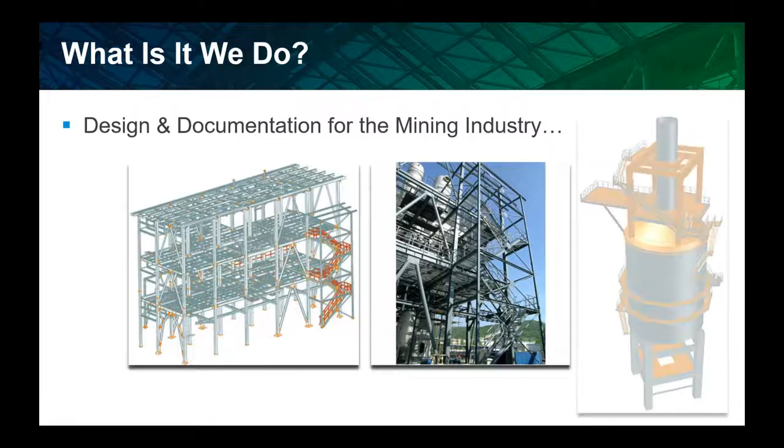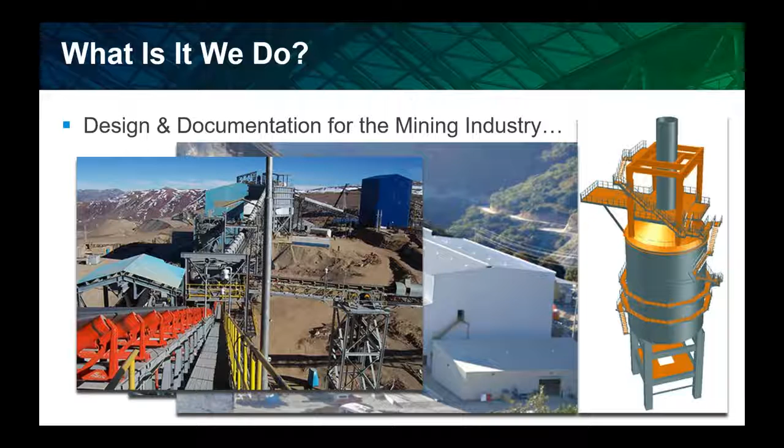We have a lot of enclosures that we need to clad, and cladding is an aspect that we can find in Advance Steel, and there's a lot of benefit there that we can even generate shop drawings on. But from the Plant 3D side, we usually find that in order to do this, we're using some CAD approach. Incline conveyors, overland conveyors. We don't really see tools in any of our applications that are well suited for this.

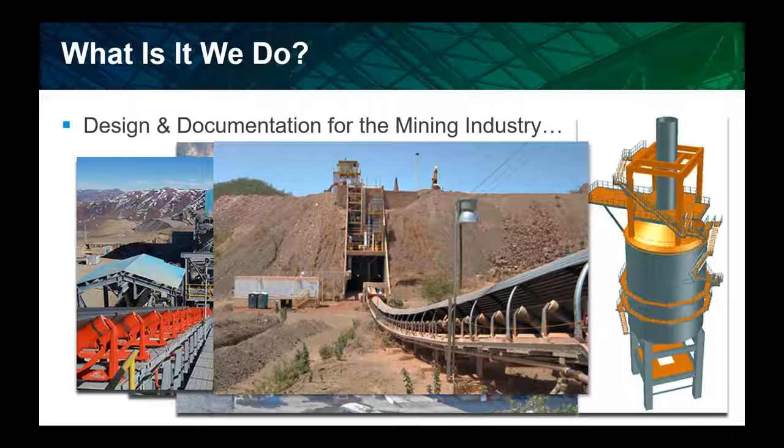So we often find on the mining side that we work in several pieces of software to generate the general assembly, the engineering drawings, erection drawings, and shop drawings as needed. And don't forget, of course, we need pathways and other alignments that may be drainage. It may be passageway for any vehicular access and so on. So Civil 3D, being an engineering package, can suit that purpose, and we find that a lot of our mining clientele utilize that package as well.

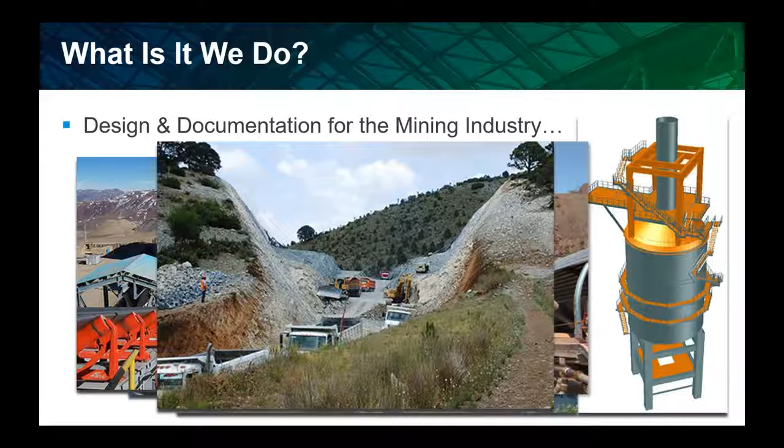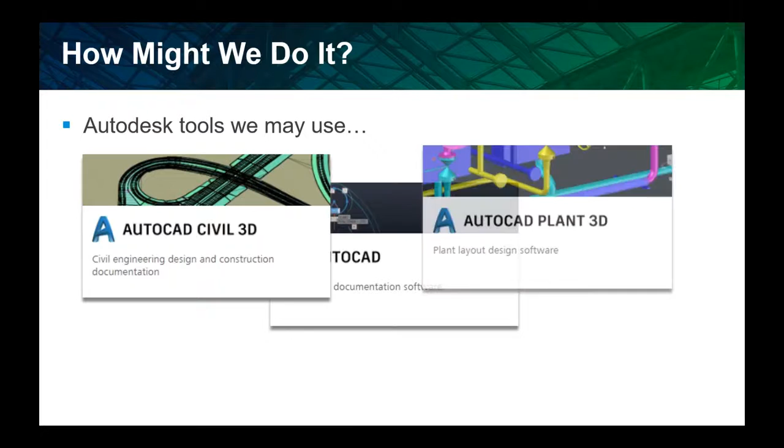So how might we do that? I mentioned AutoCAD. Even at its base approach, certainly to do P&IDs. Another reason that we like the Plant 3D software is that we can do P&IDs. There's a lot of smarts built into the P&ID module that works inside of Plant 3D, but we could do that in just regular vanilla AutoCAD. I mentioned Civil 3D for the civil engineering aspects on a mining site. AutoCAD Plant 3D itself with P&ID on board.

Navisworks Manage. I hope no one forgets the aspect that when we generate these big three-dimensional models in whatever software it may be, Navisworks Manage is a capable tool that can support multiple model file formats from varying industries and varying suppliers.

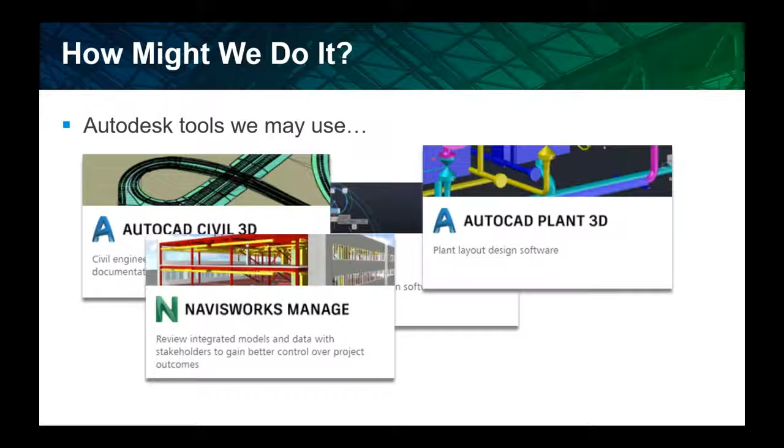One that you might think a little unusual, Revit. Its structural aspect; we don't really refer to them as architecture, structure, and MEP so much as we used to. We now have Revit all-in-one. All the disciplines are inside the application that we now title Revit. But I find several clients utilize Revit for the structural aspect. They like the ease of modeling with the building information modeling approach, being able to handle that steel.

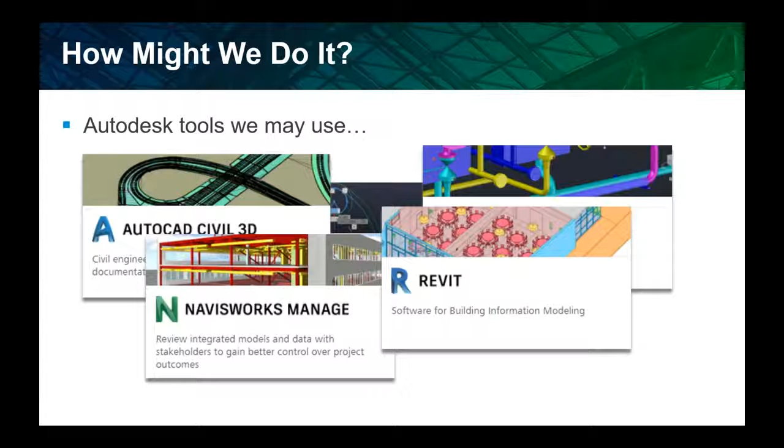I'll have some images for you in terms of then the problem becomes, how do we collaborate or coordinate between differing applications? We don't necessarily have a Revit plant or a Revit civil. We need to move pieces of information from one application to another.

Another aspect that we find involvement of, the things that Mary mentioned to you initially that CADSoft does as services, we have been hired by some of our mining clientele to actually go on site, whether we are doing drone service flying, a UAV approach to do aerial capture of imagery and converting into topography that we can use in Civil 3D to generate alignments, earthwork calculations, and so on, or terrestrial-based scanning. We have performed these kinds of things, so we find then that ReCap Pro actually is a processing software in our Autodesk suites that we can utilize to deal with the point clouds that we can bring into all of these applications.

Now, these are only a few, and I'm sure everyone has probably heard of or already used the building design suites. Of course, that's a little bit of a name of old, and now with this year's release, we have collections, and I'm showing you these package names here because inside of the AEC collection, the real advantage now is that Plant 3D has moved into the AEC collection. We also have Civil 3D, we have ReCap, we have Revit, Navisworks. There are 20 applications and cloud services that exist inside that AEC collection, so that better fleshes out what we may find ourselves using in how we have to span the differing applications to do the differing discipline roles that we utilize inside the mining industry.

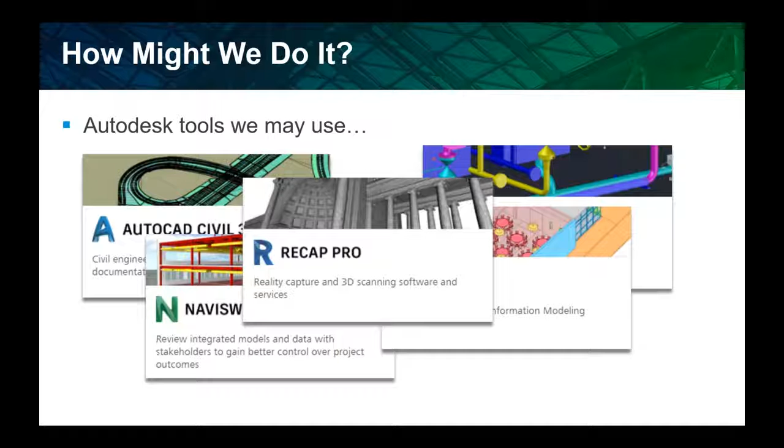So today's focus is Advance Steel, and in the very most simplistic summary I can give you, 3D modeling for steel detailing. Steel detailers may just simply be doing the design of connections. There may be a little bit more on design, but not only can we generate a digital prototype, we can also generate shop drawings, and we can further push that into fabrication and then construction. There's a lot of capability inside that application.

So what does it do? Here we're seeing an image of that digital prototype. We come into Advance Steel, and by the way, let's mention that Advance Steel sits on top of plain vanilla AutoCAD. A lot of the commands and familiarity we have if we are AutoCAD users. All the simple copy, move, rotate commands exist inside the application. But we're coming in here and we're now generating a 3D prototype.

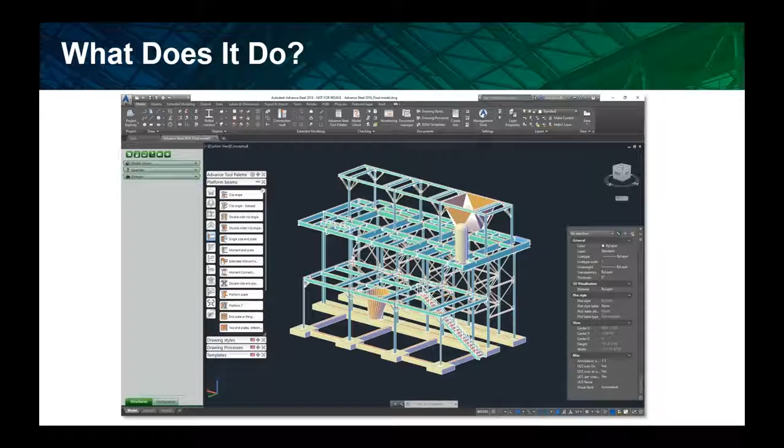And I get a little capture of the fact that we have specialized tools, and we'll find that Advance Steel is macro driven in that making these connections and placing these parts and pieces are automated in a certain nature to get all of the instances inside of a large project to that point so that we could then more quickly generate the documentation.

We have a manager on board inside Advance Steel that gives us the ability to organize our single part drawings, our main part and assembly drawings, our GA drawings, erection drawings, and so on. And also the ability to have reports and lists of many different kinds of things.

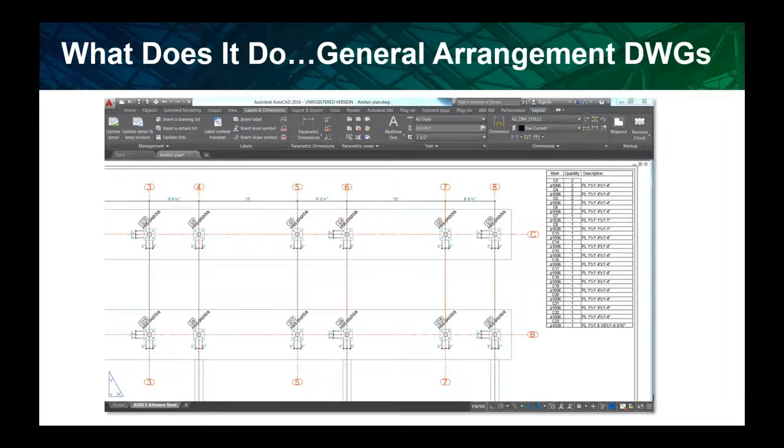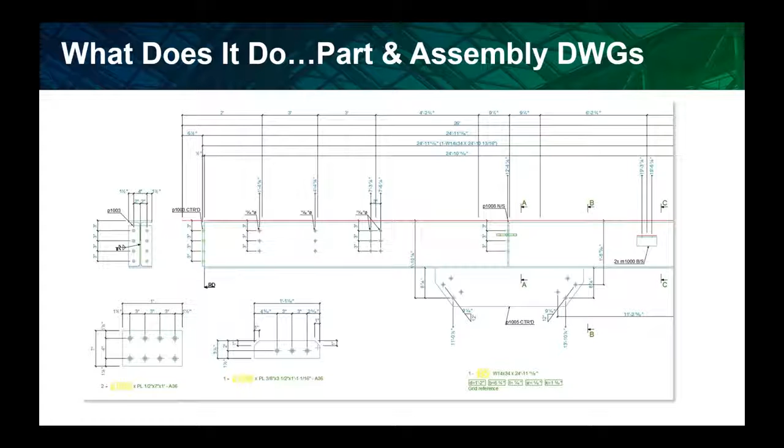And then I mentioned about pushing toward fabrication. So we take the model, we generate the assembly drawing. The assembly drawing has a lot of database connectivity to it. We can then create numeric control output. We create DXFs to push these out to presses and punches for plate creation, beam lines, and so on. So we have the ability to generate fabrication right from the model that we have coordinated. It is a fabrication level of detail model and everything we need. So a real plus that it can offer.

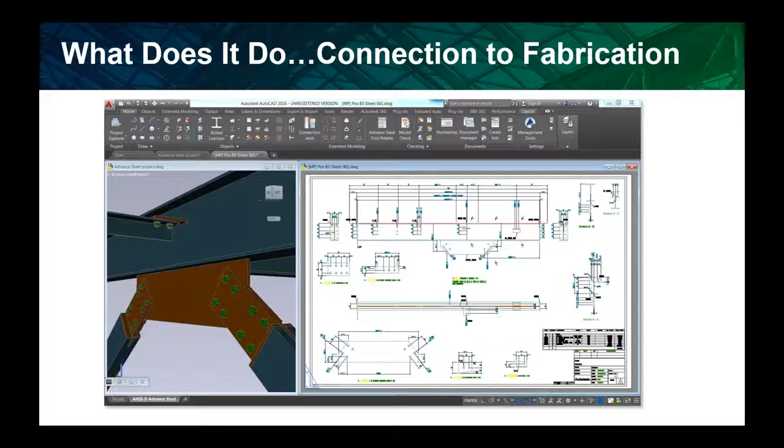Now, specific to the mining industry, we may be wanting to do some specific things. Why might we want to use this in conjunction with what we do in Plant? Plant does have the ability to generate some rudimentary profile sections. It has a large database, whether they be tube steel, standard pipes, wide flange sections, angles, channels, miscellaneous channels, and so on. It even has railings, stairs and ladders. Advance Steel has the same capability, but we have a benefit, and the strength that really comes from Advance Steel is miscellaneous steel.

So here we're looking at an image of a conical folded plate, and we see the facets at the radius corners. We have a rectangular or square to round shape transition with beam flange mounts that are bolted, if you can see the bolt shapes there. But the benefit there is that Advance Steel can do something that the Plant work will not do, and that is simply unfold this. And in our drawing generation, we can take that unfolding, and it will, however we define, place automated dimensions on there. We can break that up into multiple pieces in case it is too large for shipment or too large for handling, and it gives us the ability to manage that.

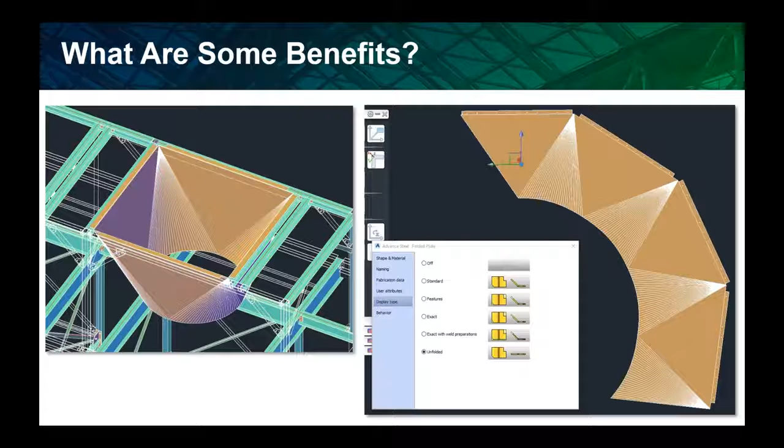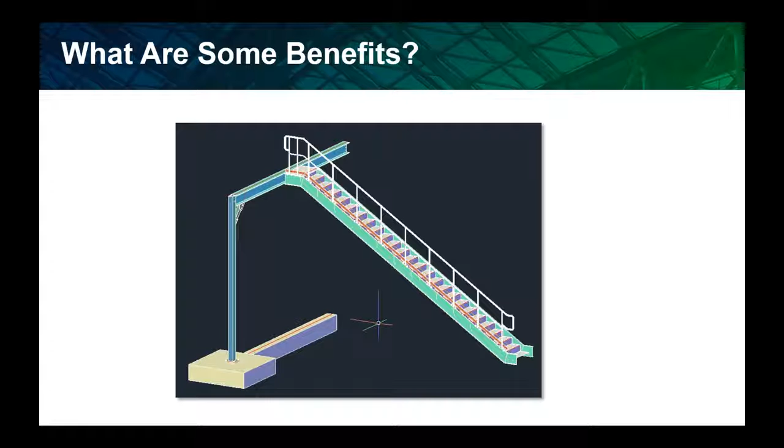I mentioned the benefit that it runs on top of AutoCAD, all the familiarity there. The fact that it has a level of detail 350 tool for stairs and railings in this simple little capture here. Full editability of all the parameters and how we want to define these. And one of the other great benefits is how we can go in and save configurations. Like if this particular stair and railing configuration was one I want to use again and again, which is an expected approach, I don't want to have to set those parameters up each time. I can save it to the library and with a single click apply that in a future project or in this same project on another instance.

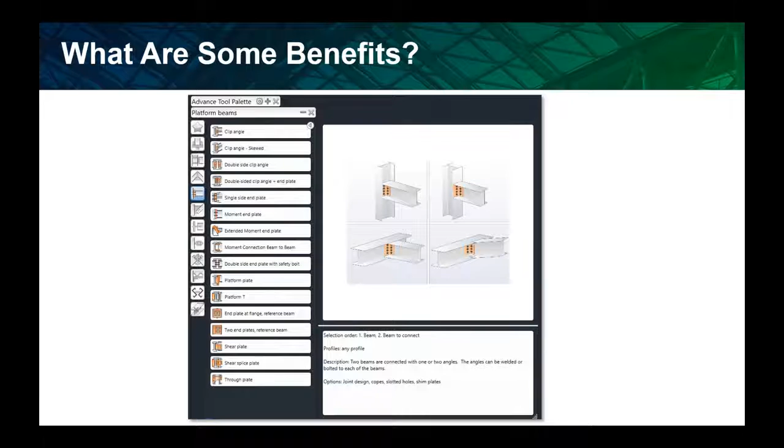And I mentioned, of course, the connectivity. That's the real crux of Advance Steel, is that I have these macros, and you see by name, I can create clip angles, end plates, moment connections, shear plates, through plates if I have tube steel sections, and so on. Having this information that can actually place these parts and pieces and then give me editability at the time I'm creating them or to come back after the fact is a real advantage in terms of steel detailing.

All right, well, why might we use this? And if we do, how might we do so? Well, I mentioned some of the other applications, and I'm going to talk about really three here: Plant, Revit, and Advance Steel, of course. So in versions of old, if you've ever tried to utilize a steel package, we always did a steel detailing neutral format, that SDNF file format export.

Okay, that's something that existed inside of Plant. It still does, even though if you look at the most current version, we find that now there is a button that simply says Advance Steel Export, and that is a steel markup language, SMLX, a little bit different file format. So people might wonder, if they've used the SDNF file format export before, did it go away? No, you could actually type it in on the command line. It still exists. You would see it autofill with AutoCAD's feature, so if you still want to use that, that feature is there. But in some form, we need to get this out.

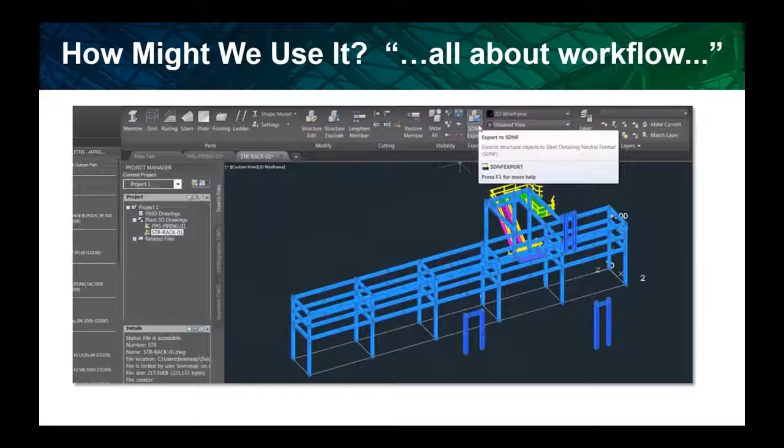I'll mention that Plant 3D does not have that capability. We don't want to send that back and forth. We want to actually move the drawing, which I'll show you an image of later, into the plant project because it has its own folder structure. But Advance Steel also gives us access to a couple of other file formats. That SDNF that I could take out of Plant and other applications can also be loaded, as well as generated from Revit. So we have a couple of options.

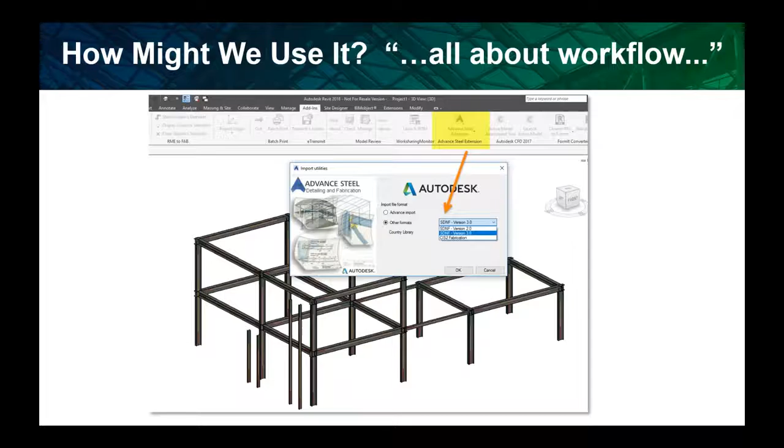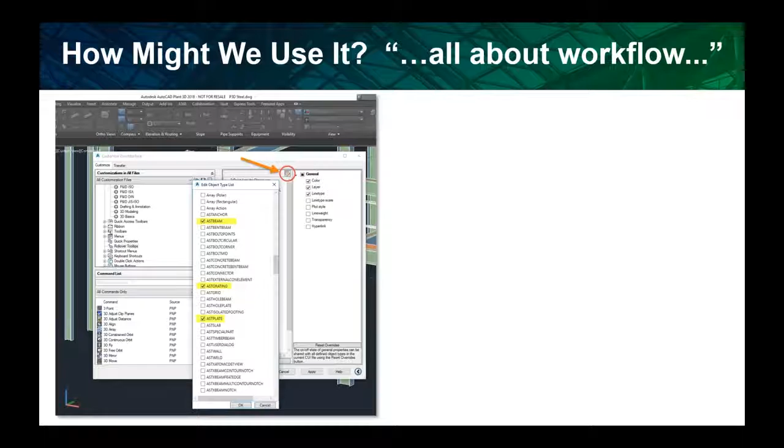Now, once it's in Plant 3D, we can take some advantage of that. If you've ever customized your user interface, if you like rollover tips, part of the CUI is what we can control the display of within our interface. For the Advance Steel items inside that drawing we copy over to the Plant 3D project, we can bring in particular properties we want to see in a rollover tip. So here I've selected categories of items. Once I have those categories, I can select them in my CUI interface, and then in the rightmost pane I can say, hey, I want to see these things in my rollover tip.

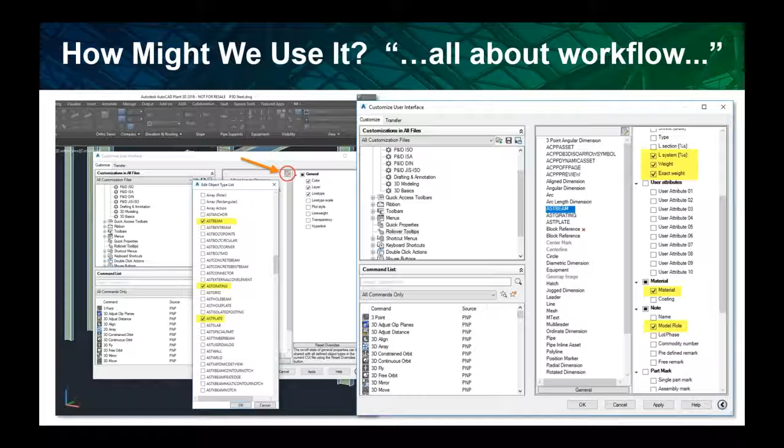I want to know what the weight is as I'm looking at things. I want to look at material, model role. I want to see what that section size is. And once we have that CUI customization performed, then when we're inside Plant 3D, we can hover over this and see the parameters that are part of that file.

So we see the profile sections, the W12 by 40. We see the length. We see the actual weight as well as the weight generated by the system length. It may have a cut length to it. And what is the material? So some real advantage of information that we move between the applications.

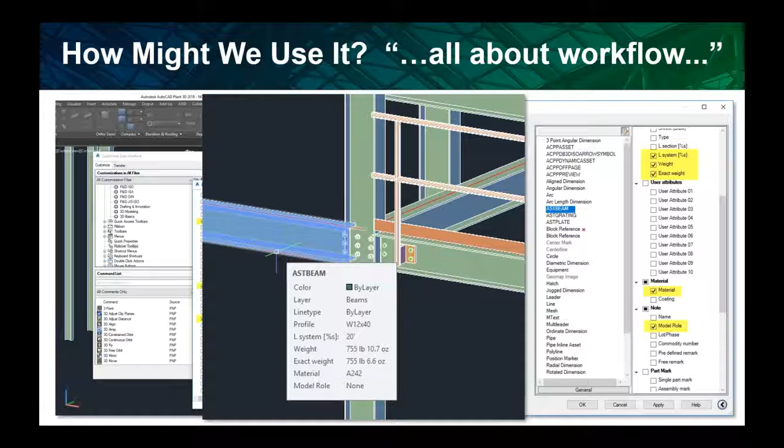Okay. Well, at this point, and hopefully I've moved along quickly enough that I can give Brandon enough time to show his excitement and what he has enjoyed about the efforts he has made. So I'm going to show you in a minute here inside Navisworks, as well as we'll bring up some things inside of Advance Steel of two sample projects that Brandon's been so kind and M3 has allowed us to demonstrate. And I'd like to ask a few questions of Brandon that will help give us a little bit more information.

And some of these images I'm going to show you right now on Brandon's screen are his office and a couple of their projects. So thank you, Brandon, for joining us today. I'd like you to maybe give us a little bit of a feel. You've stated to me that your role with M3 is a mechanical engineer. You're not really sitting on the steel team, correct? Right. I do mechanical design is what I do for those guys. And I work a lot with the structural, but I'm not really on the structural team.

Yeah, and Mary mentioned that you've used several pieces of software, and as diverse as M3's projects are, and many departments, having visited your company, I can just imagine you guys probably have about every piece of software that Autodesk has and know how to use it. So my interest is what kind of pushed you toward Advance Steel? Why did you think that would work for you?

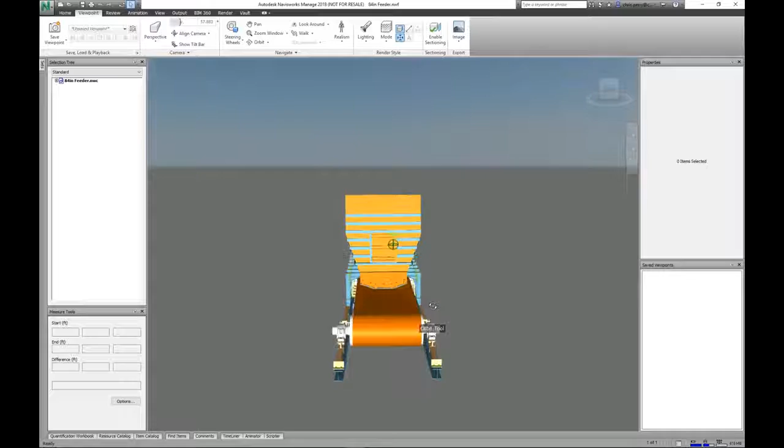Well, it seems more and more shops are really wanting the shop drawings done, and we attempted that in other programs. I know we did it in Inventor, and Inventor's an incredible program, and it's great for what it does, but with Advance Steel, you can just pipe out so many drawings so quickly. Literally, in just minutes, you can do 100 drawings. It's just really, really quick. And so the focus and the reason for using Advance Steel was that strength in it, and it's easy to detail in there. It's easy to do the drawings in it.

Okay. Well, I'd like them to not take it from me, but what was your thought on the ease of use and learning, related to AutoCAD, and how did you go to approach it? Brandon didn't come to me for training, which is fine. That's fair. I imagine with his ability, he probably taught himself a good deal, but can you share with the listeners what you thought about how easy it was to get into it, if you think so, and what was your approach to beginning the learning process to Advance Steel?

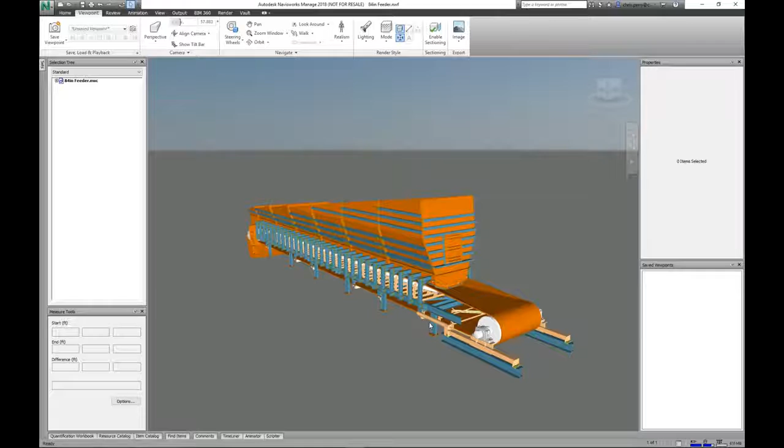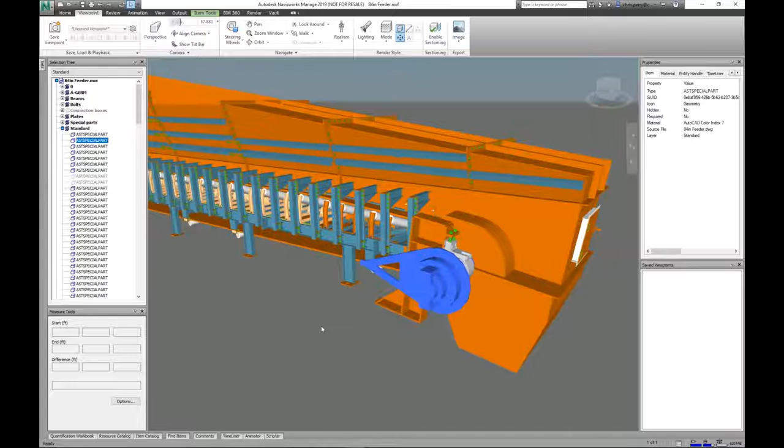Well, I thought it was incredibly easy to learn and use. I'd never seen it before. The very first thing I did in this program was this real large set of chutes, multi-layer chutes. I actually designed steel and everything in that area, and it was a retrofit to an existing steel structure that was there. So in that whole system, there were diverter gates. There was a lot of complicated stuff, and that was the very first model I ever did in this program. And I actually did it with a 30-day trial, before we got any license or anything.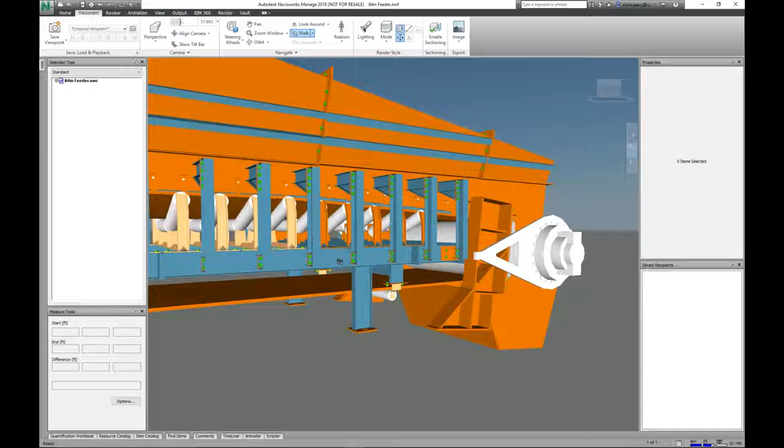And so it was super easy, very comparable to Revit in a lot of ways as far as how you can mold and manipulate things, but it has some strengths that I really loved. It's a little beyond Revit, how you could just simply cut plates and reshape them, and stretch them. You could do that just like you do in Revit, stretch them over, extend them. It's very, very easy to model in. For me, it was. That's good to hear.

I agree with you. I'm whole hog Revit. I do a lot of stuff in Revit. I do structural work, so it was natural for me to come into Advance Steel. And many of us, if not practically all of us, have used AutoCAD at some point. And it was an easy translation. I like the macro-driven approach and the parametrics, what you're mentioning, the editability of those plates.

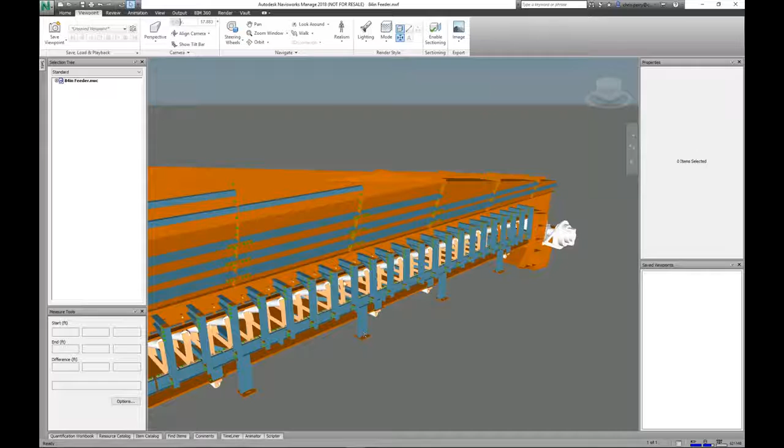And you know, I'm in Navisworks at the moment, showing one of the two models that Brandon provided to us. And I might have him describe a little bit about this. He's got it titled as a feeder, right? And this is loaded with plate work. Right. It's a feeder. It's coming out of the filters.

If you zoom in, there's an interesting part of this model right here. If you zoom in on the skirt board, there are those connections you're looking at down there on your skirt board. Go down, down, down.

That little knee part, that's all done with Advance Steel. I didn't do the beam, but that whole entire little connection there is Advance Steel, coming off of that skirt board and going over to the beam. That piece between the skirt board and the beam is an Advance Steel piece. So you can actually do stuff like that with ease in this program.

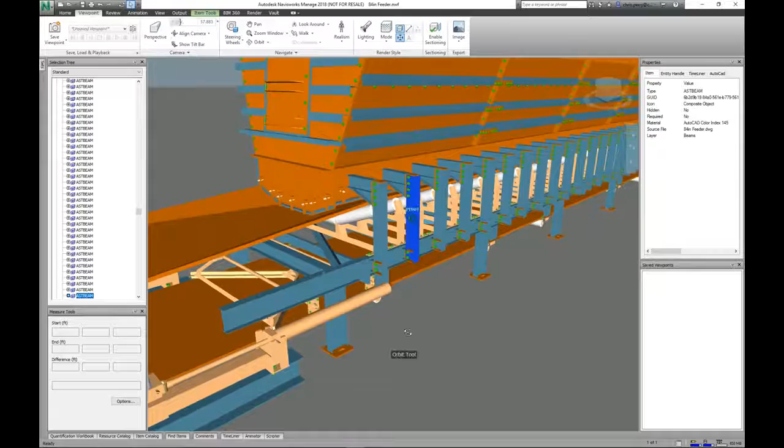Changing things in it, I found was very easy. Again, it's a lot like Revit, but it's got a little more control in that you can select something and tell it which direction you want it to move and how far, and you can turn off your other UCS directions and move it only in one direction. So things like extending beams - if you select a beam, it'll give you a grip on the end of it. If you hover over that grip, it'll give you your UCS, and whatever direction you want that beam to go, you grab that UCS, and no matter where you snap it on the plane, it only goes in that direction. So it makes it really easy to extend beams and do things like that.

Everything in the model except that bearing right there is probably, I think, done in Advance Steel.

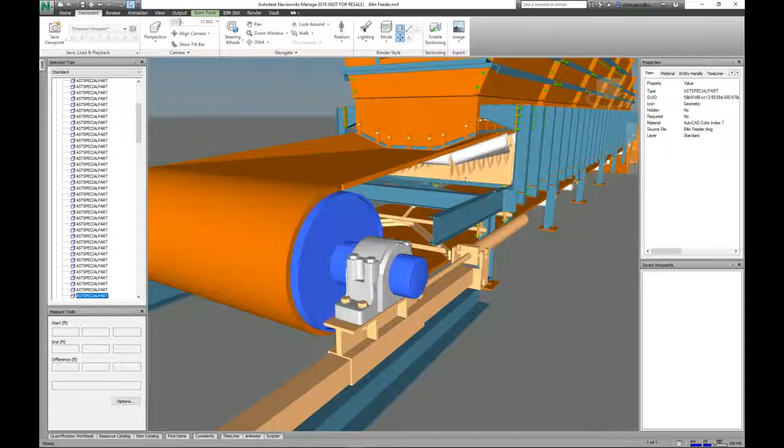I wanted to ask you about that. It's interesting - as with anything, no one application does or has everything that we need. We're looking at some unique items here - we've got these trough idler arms and other tensioners, and you mentioned this bearing or its mount. These items, if I remember our discussion, are they Inventor items? No, this is... okay, you did do these. Okay, what about this item here?

All of that is built in Advance except the bearing. What I did is I built that in another program and brought it in as a special part, and that's what enables you to bolt to it. If you use the tools in Advance Steel, like the special part tools, it recognizes that piece, so it gives you the correct bolt lengths when you bolt it.

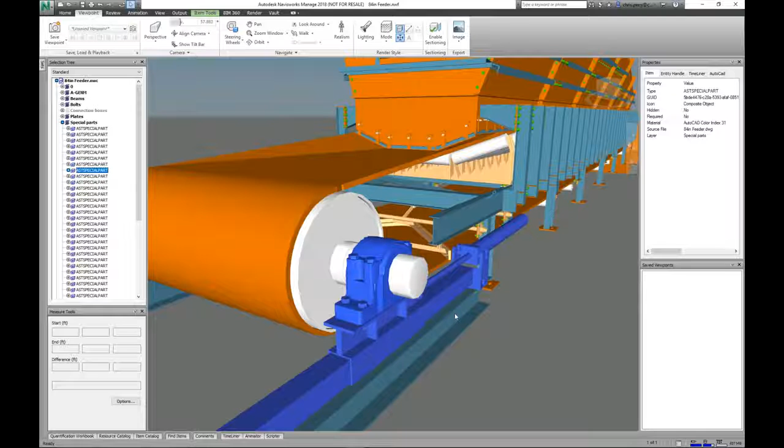If you zoom in on the idlers, you'll see the bolts on the idlers - it's the same way. I built the idler in Advance, but I brought it in as a special part. So when I bolted it, it recognized it, and it bolts all the way through the part, giving you the right length for your bolts.

Yeah, and that's one of the things I was really wanting you to mention to them - that when we have parts and pieces, especially with materials handling like this, we can build them in plain AutoCAD if we like, just simple 3D modeling. It could come from Revit. I could bring vessels or other items that need some connectivity, mounts, whatever it may be, even plant equipment and other items that may be there. If I want to detail that up, or generate some connectivity, I can X-reference the plant information into Advance Steel. Whatever approach I may take, the interactivity is very effective.

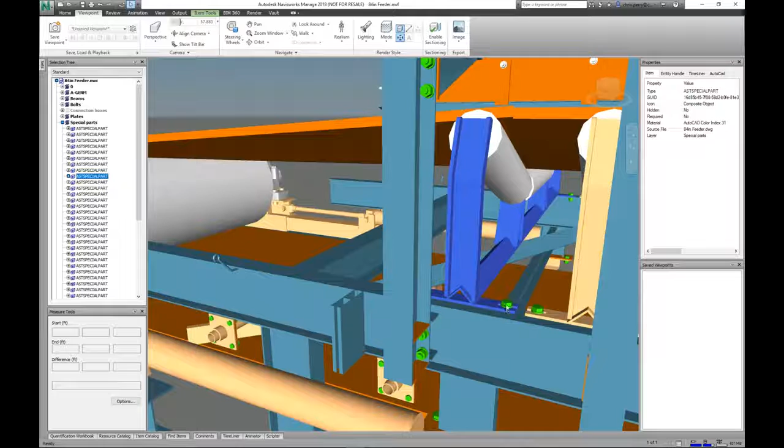And the fact that we make it what you called an Advance Steel special part - it's like a special block that sits inside Advance Steel, and then the connection macros will work with it. One advantage we gain is that inside these objects, you might need to put an AutoCAD point or a line reference, so that way you can snap to nodes and things that are a lot more dependable in the placement of those items.

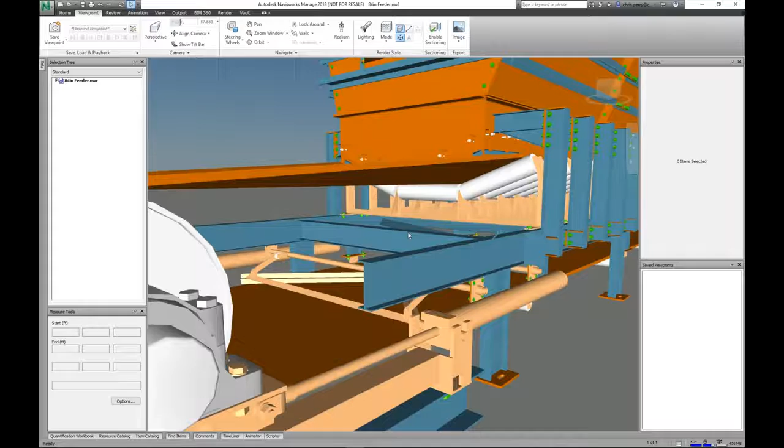So, yeah, I definitely wanted you to tell them that. Yeah, if you bring it in as a special part, it knows it - it's different than if you bring it in just as a block. If you use that special part tool, it definitely recognizes it a little differently. Also, very interesting, I believe you made this out of parts and plates, and made a folded plate out of it, so we can even see a transition. And he's just representing the conveyor belt here, right? Right.

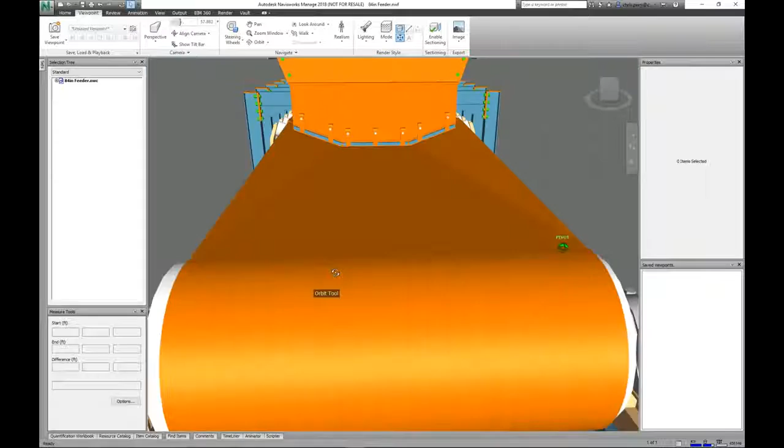So you could even give it a material and a coloration, and that way we could populate that inside of any GA drawing. We see the context of what we're after, and that's usually some of the things we're challenged with. Let me quickly open that other file.

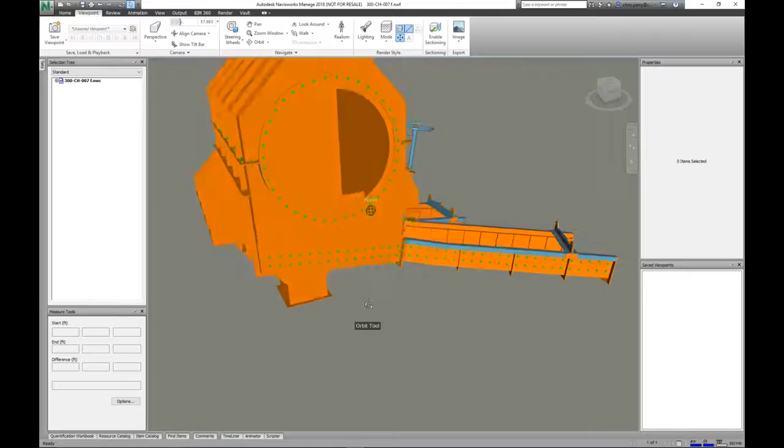You can tell us about this type of chute object. All right, this is coming out of a mill, out of a ball mill, and it's got a diverter. If you look in this steel, it looks like a steering wheel. That's kind of a little diverter gate to where they can control how much flow they want from one sump to another.

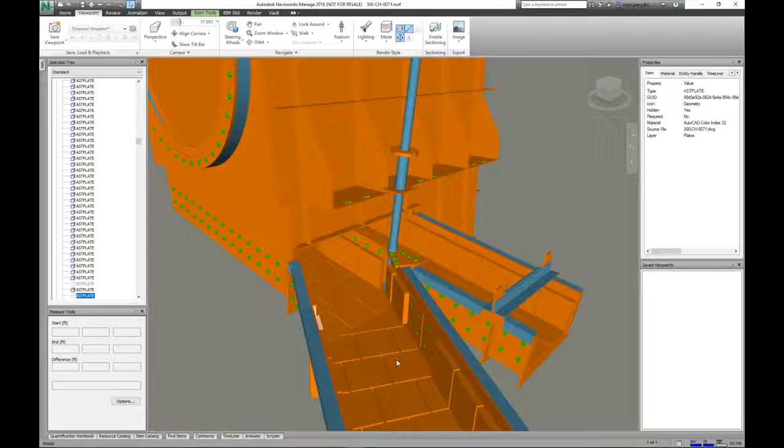And so all of this is Advance Steel, and some of these liners are rubber. That's one of the beauties of Advance Steel, it's just endless. The materials and the different types of steel are just endless. I found the steel library in this thing is crazy extensive. It is, it just goes on and on.

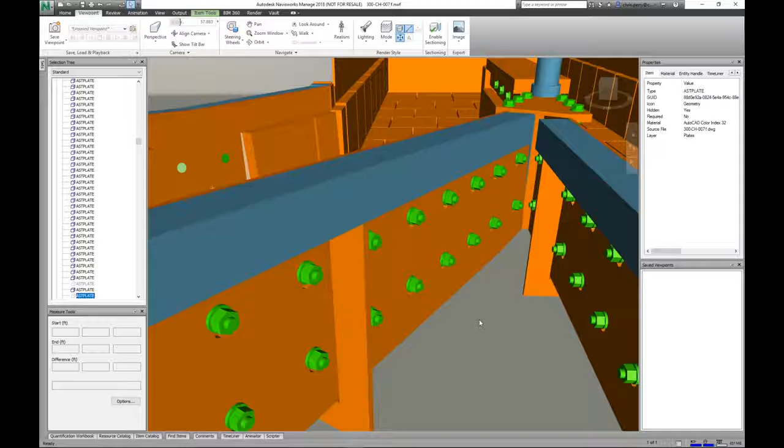We might mention that the countrification in terms of sections and materials and other things means you can utilize many sections if your company works internationally. We're not stuck to just imperial or just metric, but in terms of profile sections, fasteners and other items, there's a countrification with a very large database we can add custom items to. If we don't have something we need, or there's something unique about our project or a mechanical assembly, we can create our own custom user sections, our own custom connections, and so on. It's very helpful.

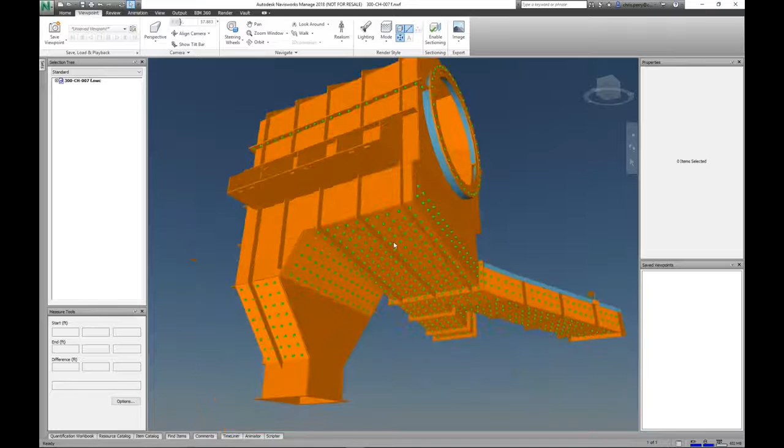Yeah, this one was interesting. There's a load of plates on this. We've got externals, stiffeners on these plates that house the enclosure, stiffeners here, lots of bolt work. I don't remember if I did a bolt count on this one, but it was in the hundreds. The feeder model we had up last, when I looked at plate parts, there were over 900. That's a lot of stuff to model.

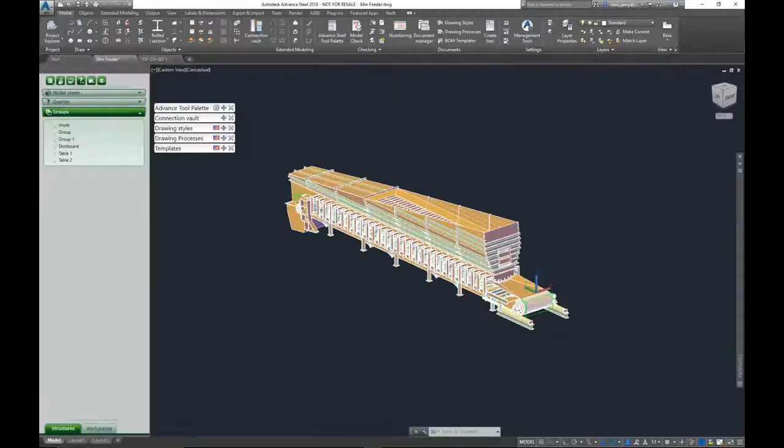So having a tool that can help generate that in a more automated fashion can be very advantageous if we need to go the modeling route. It'll produce those drawings incredibly quickly too, and the single part drawings are usually in really decent shape. I was surprised at how well it did those. In the assembly drawings there's a little cleanup needed, but it's amazing how well it does the drawings. We'll open up some drawings here in a minute and look at that.

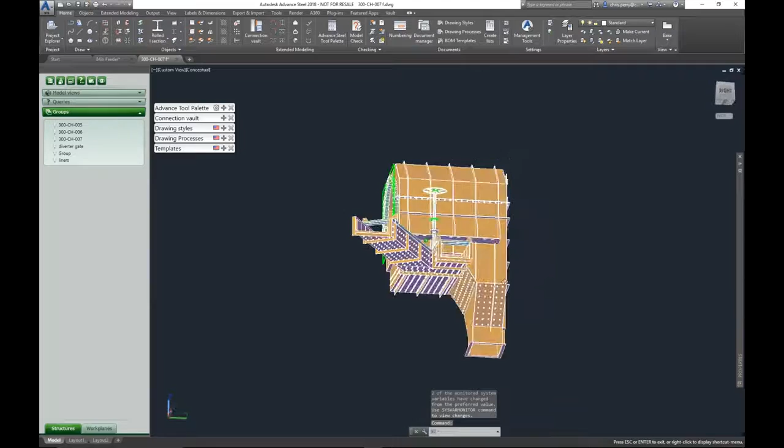Brandon gave me an earlier version, but of course I don't want his proprietary information, so I generated some stuff out of the box, and we'll open and look at that. But right now we're in Advance Steel looking at his actual project.

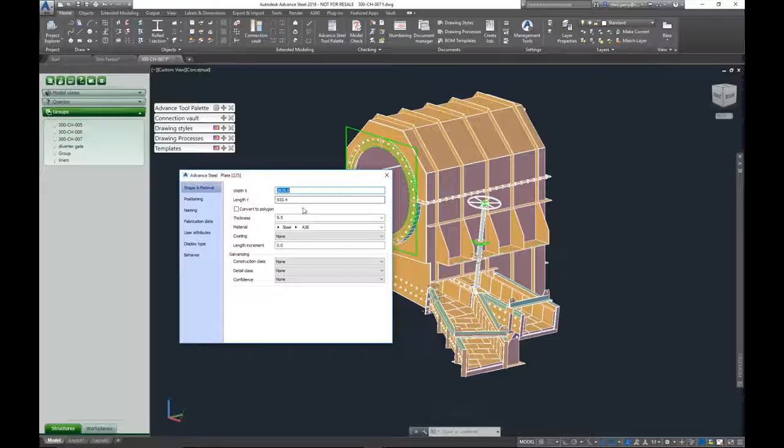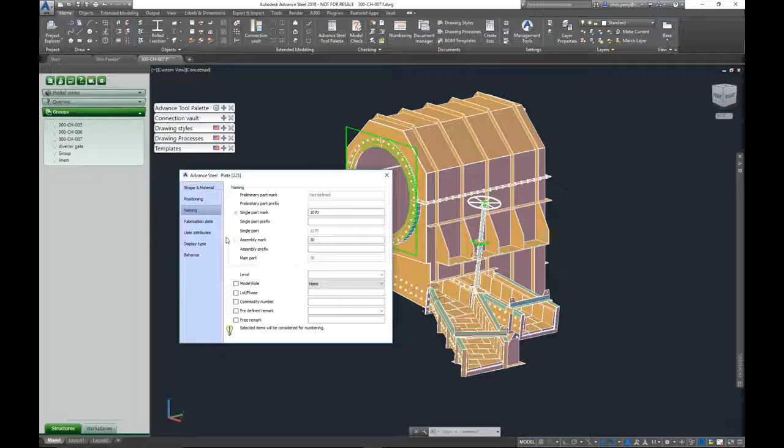If I double-click on any of these particular items, those macro dialogues pop up, and we see it has a width and a length. I can define an absolute thickness to that, edit it after the fact, change materials, positioning. When we get into documentation, in the process of numbering and prefixing all the parts and pieces of a model, you can see that's part of the object's parameters. I can even define them in specific roles, whether they're braces, plates, or a specific type of plate, and so on. This is what the drawing styles use to actually generate those automated drawings.

Now let's look at the document manager here. I said I had created a few, so let's take a quick look at some. We want to save enough time if people have questions they'd like to ask us, and get those answered.

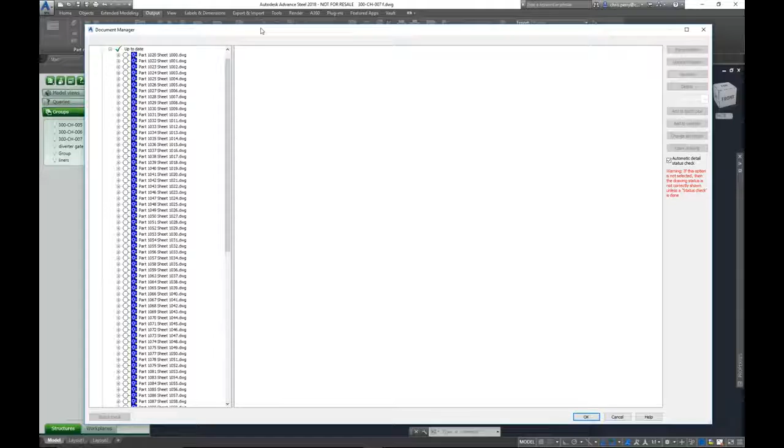Inside our document manager, which you saw a screenshot of earlier, I have generated some part drawings. You can see the name, and we have complete rein on how we want to generate our numbering conventions, our drawing names and numbering conventions. I don't have any GA in here, so I'll show you how we can quickly generate a GA drawing out of a particular viewpoint. Let's click on a few of these. We have property information, and we can preview the drawing, the part drawing.

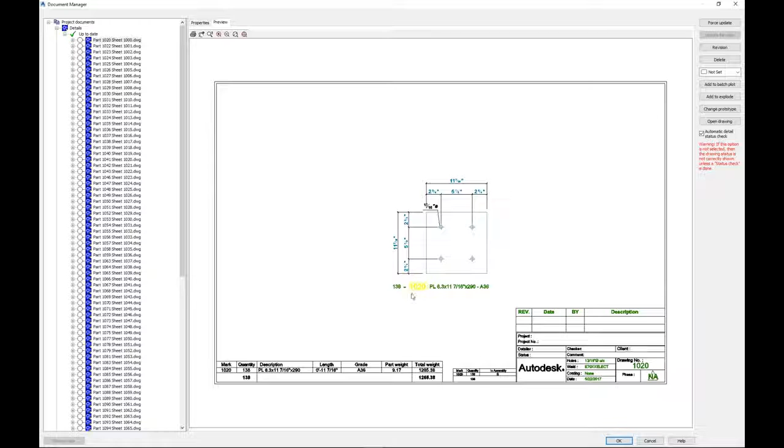This is just simply one plate, but note in its labeling that, wow, okay, I've got 138 of these pieces. The application knows that if something is different, it makes a new part designation.

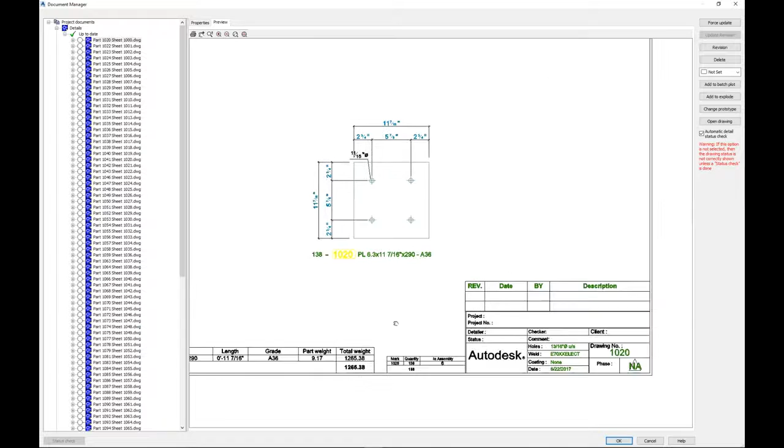Here we have this plate and size and material, this layout, and we see the structured list down here defining some information about that and the count. We can even generate reports and structured lists that can exist on drawings that show weight, such as the total weight of all of this particular part. A lot of useful information right there.

Some drawings may fit, some may not. They usually require a little bit of tweaking, but we can see even in its simplest form, these are all part drawings. I generated these on B-size sheets. I find that our shops really like having a smaller format, an 11 by 17 format that fits on a clipboard. Having the number of part the same as the drawing just eliminates manual error or confusion at times.

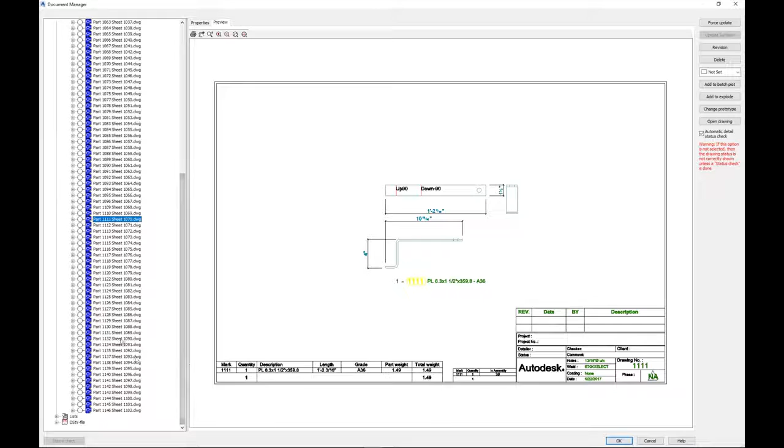And since these are single part drawings, very likely they all fit very well. Advance Steel finds its limits, how we define the prototype. It will set a scale automatically for us. And just, like I said, we have the ability to kind of customize a lot of things we want.

Now, I said that I didn't have any GA drawings. Let's just look at how Advance Steel does that. And Brandon has mentioned more than once about how quickly it can generate data. That list of part drawings there took about 3 minutes, I think, when I generated that, but I still didn't want to take up time for us today in doing so.

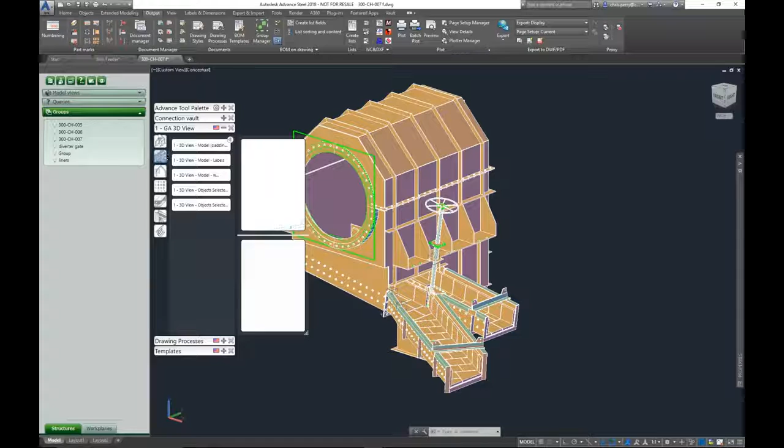But let's look at some of the drawing styles we have. We have a collection of engineering drawings, GA drawings by title, and you'll note that very helpful tips it gives us when we hover over a particular type of stylization we want to use. It's a 3D model with labels. So it even gives us information about how to do it. Again, that easy aspect of using the tool.

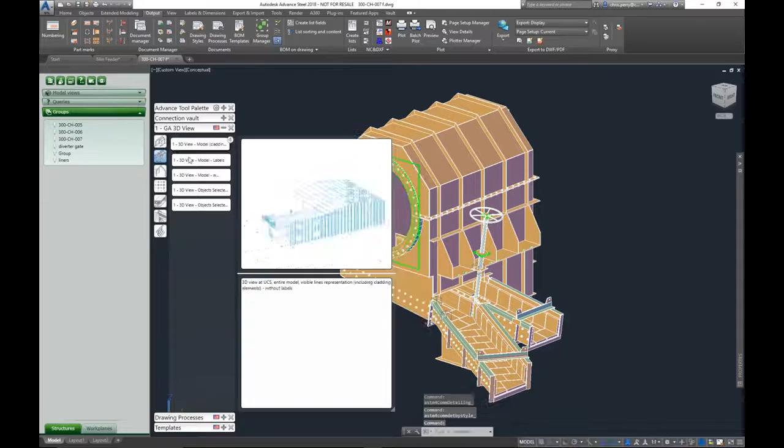We want to generate a 3D GA drawing here. I'll just click on this particular option. Now, the thing about it, and I didn't remember to do so, let me cancel that. Note what it says: 3D view at a UCS. So I have to set a UCS.

So that gives us a chance to look at our Advance Steel tools. If this is the view I like, I'm going to come in here and actually define the view. So I have a tool that allows me to set the UCS per the view as I have it on screen. I can just freely orbit, click this button, it sets the UCS, come over to my GA grouping, I'll say 3D model view, and I'm not going to do it without labels.

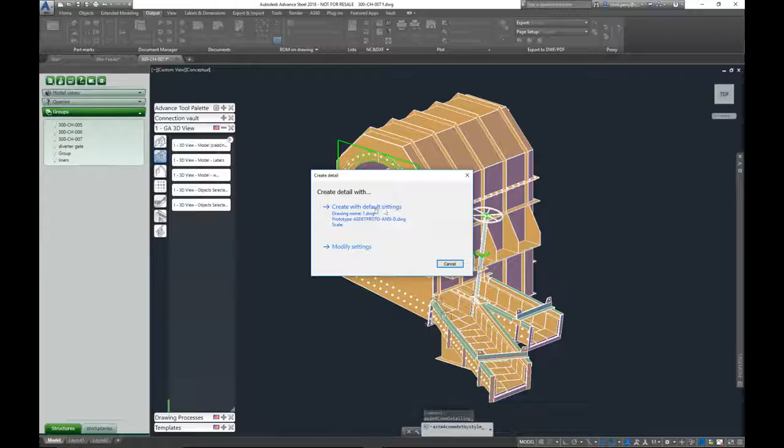I just want some isometrics as well as elevations maybe. I can choose the default that's defined in the settings, or I could modify them at any time. I could give it a name if I want. I could say, hey, this is GA01.

If I already had a GA drawing, I want to place this newly captured and created viewpoint, I can put that on an assigned existing drawing already. But I will go ahead and generate that.

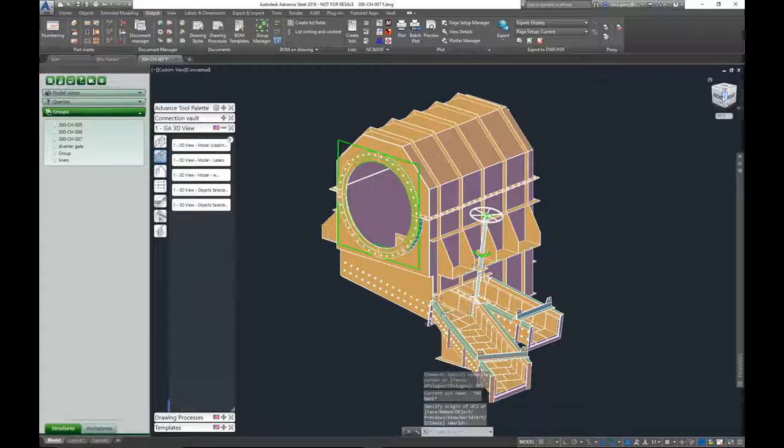It generates any of these drawings, and these are just simple three-dimensional projections. They're not terribly complex like all the annotations and labels that we can create. But just let me create a couple of these. Let's look at it from this viewpoint. I'll create another, and there are other types, certainly.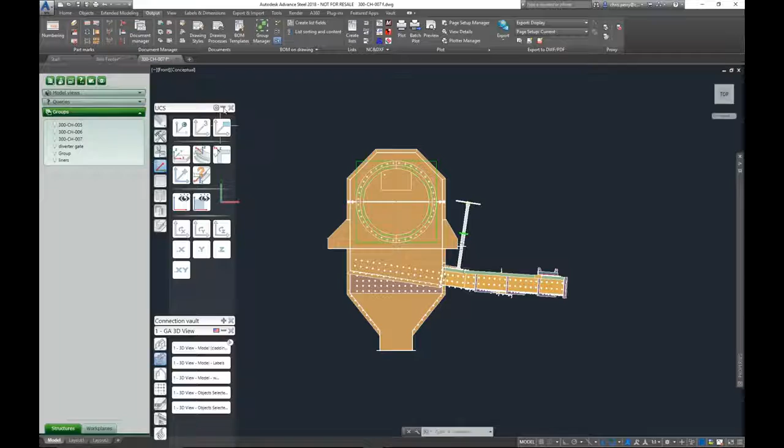I've done it sometimes, and it's the same thing with plate creation. We did so much plate work, Brandon probably has this ingrained in his process. You've got to set your UCS when you do a lot of these tools, as well as the drawings. All right, he saved me.

All right, let me modify the settings. This time, I'm actually going to place it on an existing drawing, which from my list is GA01. I'll just go ahead and let it do that. We'll bring up the document manager again.

When that's completed, we'll expand it and take a look at our GA drawing 01. There's the preview. All right, it's very easily created. We could fully edit these. We can add dimensions and text. We can change the scale of these.

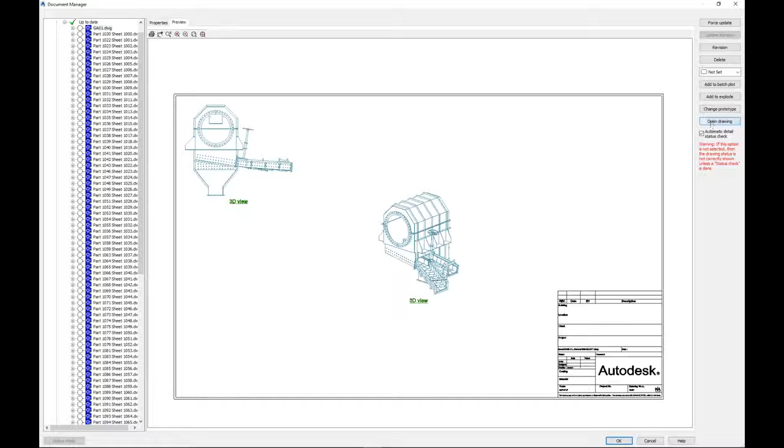You see that there's an open drawing button. It opens the AutoCAD drawing for us. We're looking at the 2D from paper space. And there's some uniqueness to how Advance Steel functions. We have some viewports for details as well as the model view. I can drag these around as would be necessary.

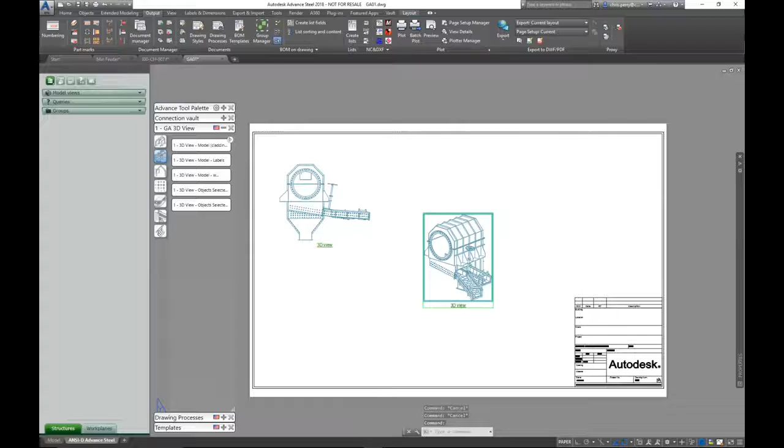I can double click those to gain access to property information unique to the view, such as scale. If I wanted to change that scale to something larger than 3/8, maybe I wanted it to be 1 inch, whether that's going to fit or not, I can choose that. If I'm clipping the view in any way, I can alter those settings, symbols to use when I'm clipping, and so on. Just a lot of assistance in terms of how we generate drawings.

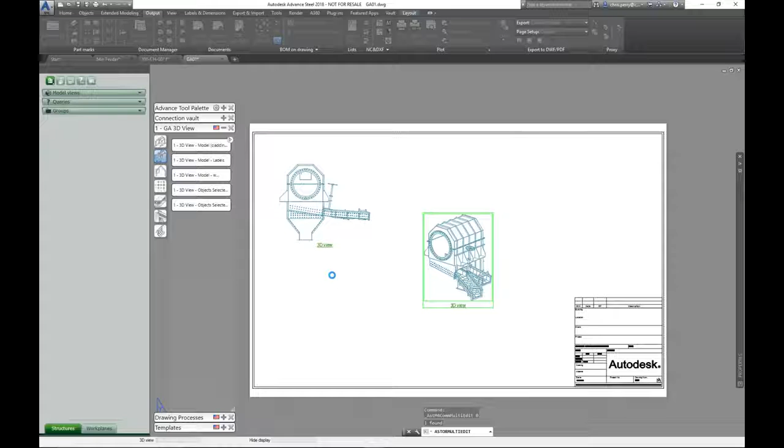We'll let this one process here and update the view, and I think you get a feel for what we might do. So very big drawing now. Let me point out one other one, that it is a parametric approach. And while we can do AutoCAD standard tools such as dimensions, we don't want to use that. We want to use parametric dimensions. And that way, if there is a cut drawing, we want to be sure to get the absolute size. So if I look at that, Brandon can tell us, yeah, indeed, that actual item is 8 feet in width.

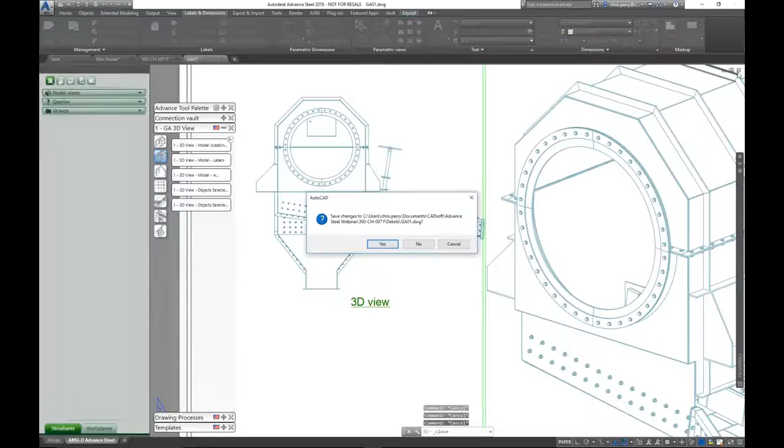All right, it knows that whatever the scale may be, or if I have a cut section where I'm only looking at a shortened amount of the beam or column or plate layout, that I can get the true parametric dimension representation there. Okay, a few other items. Let me go back to the model view. Then we can actually get to some questions if anything has come in on the chat. I've not been watching that, but I'm sure Mary is.

Let's see. Let's go over to our output tab. I mentioned the fabrication aspect. You'll see that we have the capability of NC and DXF output. You may note that we do have the ability to control settings of the numeric control, and often with many devices, whether they be water jets, plasma cutters, presses, we may need a certain file format. And going to the NC settings, often we see many devices want to see an NC1. So the files generated don't require anything more than just adding a 1 to that and saving that so that the NC that will be generated will actually do so.

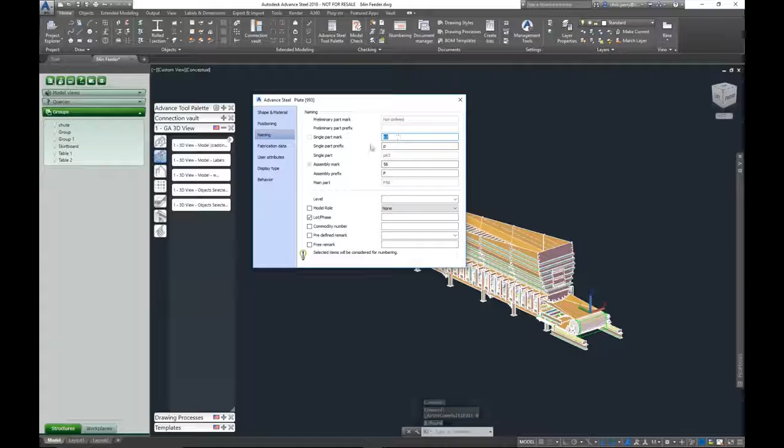I'm going to pull down here, and actually let's do the NC first. Let me check one thing. I want to make sure I've actually numbered this one. I believe I have, but let's look in our model browser. Yep, I can see drawing numbers, part numbers are there. You could also have done so by opening the advanced properties of any object and looking at its naming. There is the single part mark, the prefix for the plate. When it's attached to an assembly, that's the assembly mark it's receiving with a capital P. Again, we can customize those settings to our shop's needs. So I have done so.

Let me go back to that output tab, and we'll look at the NC generation. Data export on this. It's very quick. You didn't really get much option there. I'm going to sit for a minute because this one, as I said earlier, I think it has over 900 plates. That's just plates. We're not talking about the bolts and the beams and other items. I think that's generated by now.

And also associated with that, the DXF files. That button is DXF for plates specifically. We have another DXF for other items or all items within the project. Sometimes we just want to get our plate stuff out there. Generally, with building vertical, we're talking about structures. Plate work is about the largest amount of tonnage we've got, and then we want to get that to the shop quickly once we've got that model aspect approved, and we can do so.

Once we've done that, go back to our document manager. And when that comes up, we're going to expand another category. And we'll see that we have lists. I don't have any lists generated here yet, but we have the DSTV folders. Right? We have the list folders. We have the NC. There's any of the code information. You see each of that appended with that NC1 format.

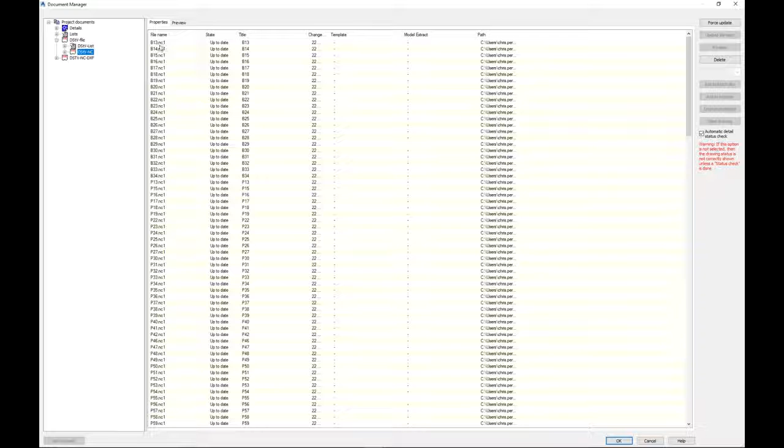You could preview any of the code data if you need to. If we want to look at the DXFs, you can actually preview those in turn. And we actually see whether it has punch marks. We see the number. We see any scribe lines, anything else that would be necessary. And there's that long list of DXF files for all the plates that we had.

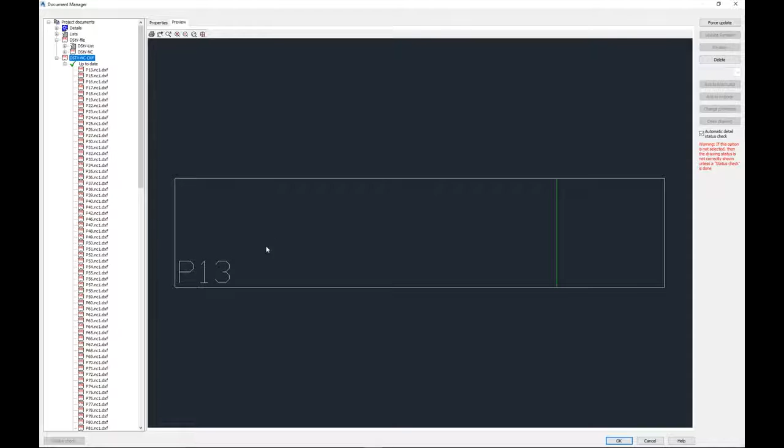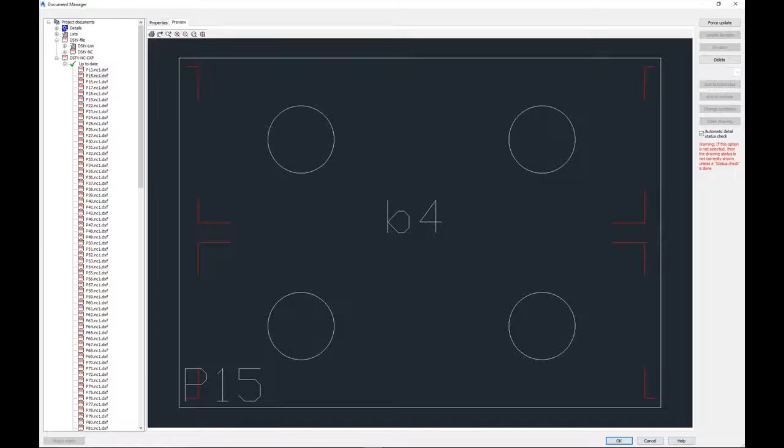I thought it would generate a lot more than that, but you've got to remember that there may be 60 of P13. So all in all, here you can see the marks for us in terms of that plate when we get out there for helping the assembly and erection in the field, lining those things up, the welders and erection team. Okay, so a lot of information can come out of the tool. Hopefully you've seen how we might approach utilizing Advance Steel.

I think there was one other slide here. Now that we've seen a little bit inside the application, let me come back to my PowerPoint here. Go to my next slide. Well, I seem to be missing my slide. There was one. I had a crash right before, so I may have missed my particular file. So, all right, it's not there. I'll describe it to you as best I can.

Once we are back in Plant, we need to think about one other thing. I mentioned that folder structure, and we do need to copy that over. Let me bring up the Advance Steel project. I mentioned that it is project-based as well. I'll slide my browser over here so you can look at my File Explorer.

Inside of that feeder project, that first long conveyor model that Brandon gave us, you'll see any bills of material that are generated, databases that are specific to this project, detailed drawings. There you see all of the assembly drawings and part drawings as well. We need all of those items inside that Plant project also. That way the steel detailer, if it's applicable for the company, works right from that project XML location for the Plant project.

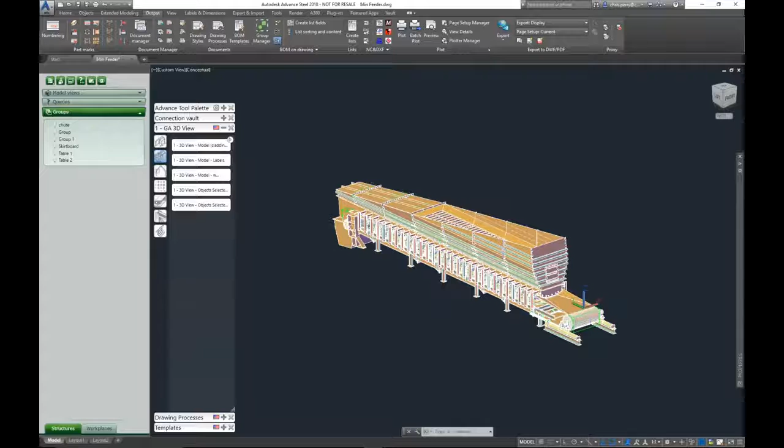There is something else it does. It also produces your cut list. It produces your assembly list and all that stuff too. That list area has what I found we needed for shops, and that's very handy, especially if you follow the rules and build your model right. It really does an incredible job of that.

Yeah, that's true. We certainly need to build the model correctly because we're talking about fabrication here. We've got to have these true size, and if we're sending this out to a table or a beam line, it needs to be correct. So obviously we validate. Like Navisworks, Advance Steel has collision detection on board, and that helps us see whether we may have something that hasn't had a cut or a coping applied to it.

Those lists that he's talking about are right here. We have bolt lists, that's handy right there. Whether we look at bolts organized by assembly or the whole project together, we can get a total tonnage of that. There are other types of drawing lists for the project. We can separate them by parts and assemblies. Anchor lists, stud lists; we have a project where we actually have studs to the flange and the building deck. Parts lists, seeing a material list takeoff for everything within the entire project.

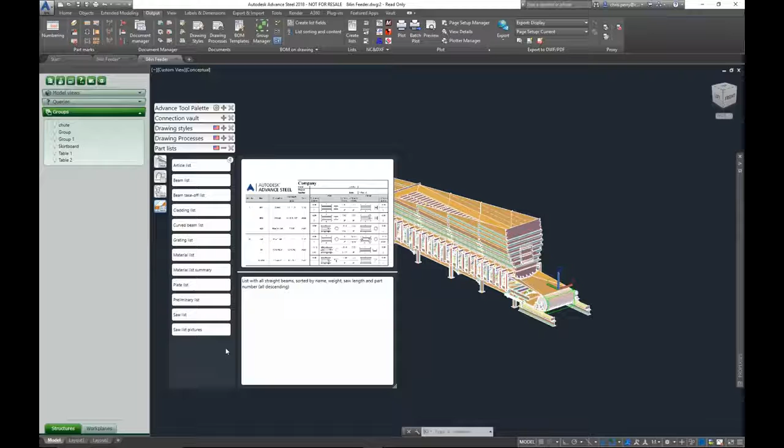Here you can see a sample. If I zoom in a little bit, you can see imagery that can even be applied. Saw lists with pictures. This one is very handy. When you have angles and you're out in the shop looking for this information, the tabular form is very helpful for that particular part. We can see the size and confirm that particular part name. So thank you, Brandon, for bringing that one up.

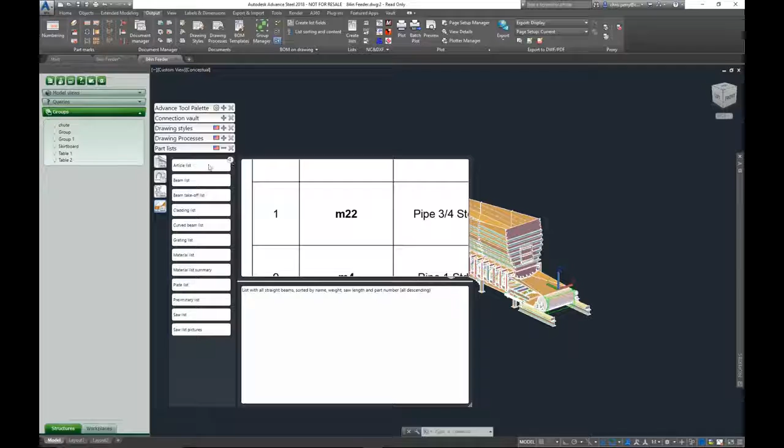Yeah, the lists and reports, just like in Plant 3D where we can create reports, parts lists, and bills of material. That's why we work with these database project-driven applications. All the data we can get out of it. We really want the information.